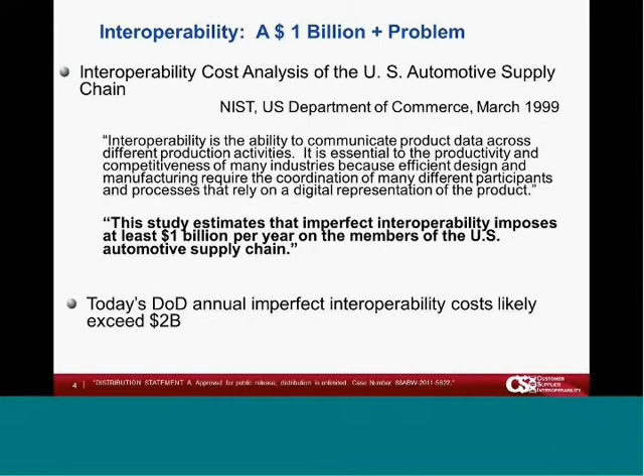And because of that, the Department of Defense and the Air Force sponsored this Customer Supplier Interoperability project, which we term CSI. It consisted of ATI, or PDES, who manage the STEP organization in the U.S. ITI is the technical lead on solutions for that.

We loosely defined this around the F-35 program. So Lockheed Martin is the prime contractor on the F-35, and two suppliers are Rockwell Collins and Honeywell. So that was our team of people.

The intent was to look at this supply chain. So we have a prime contractor, the government contracting with a prime contractor, and then they have a number of suppliers, and those suppliers have sub-tier suppliers. So the intent was to look at that, and with a large program like the F-35, there are literally millions of exchanges that occur over the life of that program.

So one of the issues we were trying to look at was the hidden cost of interoperability and making that more efficient. The other area we were trying to identify in this project was to look at this emerging MBE market. So we looked at where there were some gaps and tried to pilot some solutions that might satisfy that.

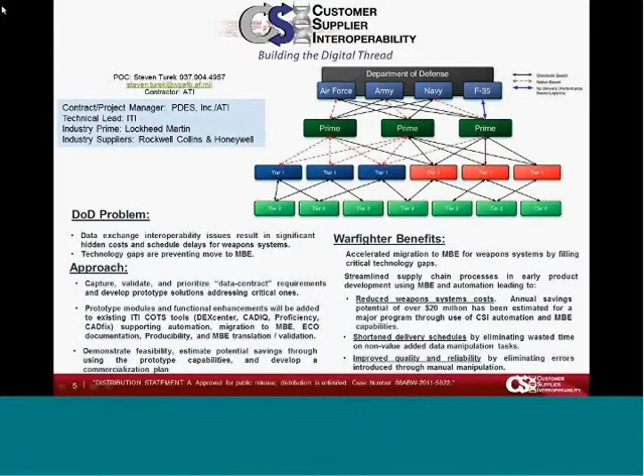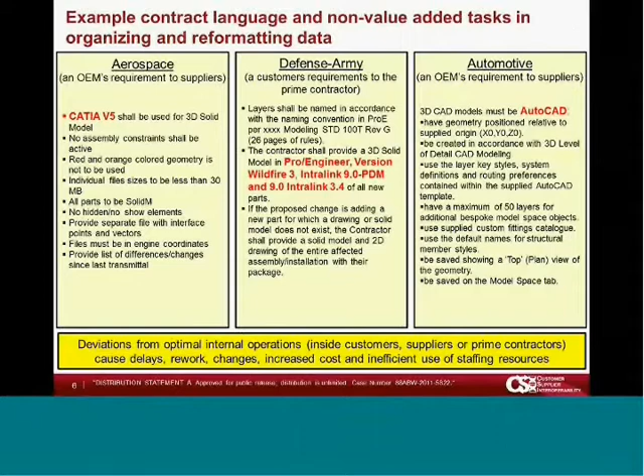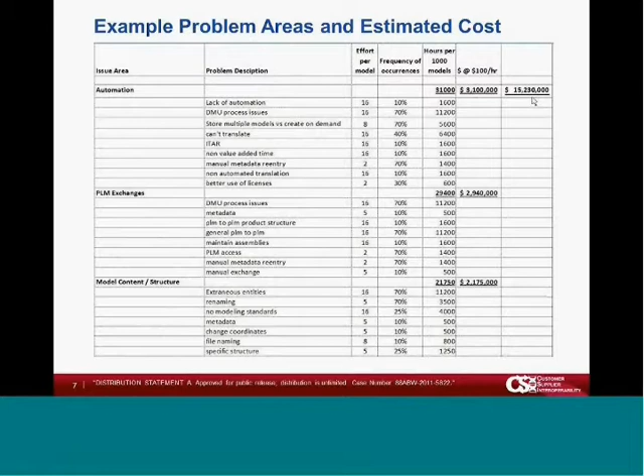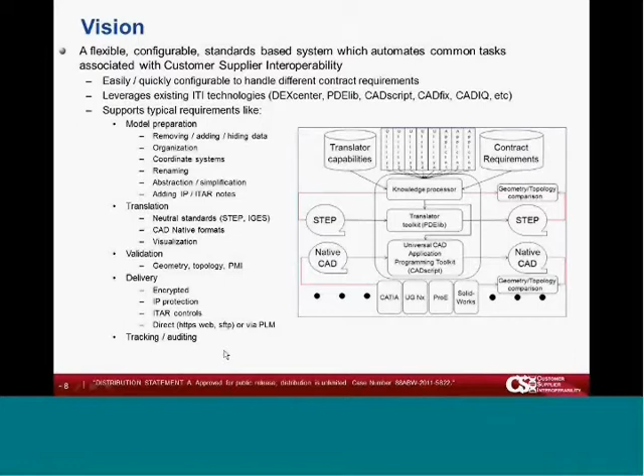Validation of that data, including the use of PMI, and then of course delivery, keeping that delivery safe and secure as you go through that process. And then being able to track what you deliver to someone as it applies.

So we said we wanted to use existing tools, and ITI was the technology supplier here in this case. So it's built heavily on ITI tools, but again, also built heavily on the STEP standards, the STEP translator support from the CAD vendors themselves. And just a little quick note about each of our products here.

So DEXcenter is the overall automation framework for this system that provides automated processing as well as delivery. We include CADIQ to do quality-related issues, validation, and we'll see some new things that we threw into MBE. We have a couple toolkits at ITI that allow us to access and manipulate standard models as well as native CAD models. Proficiency to be able to deal with feature-based and to dive deeper into some of the CAD systems. And then CADfix to provide a translation capability, and we'll see later some simulation or simplification capability.

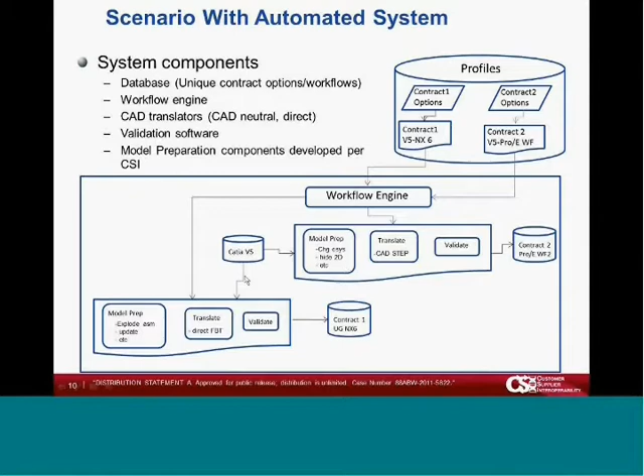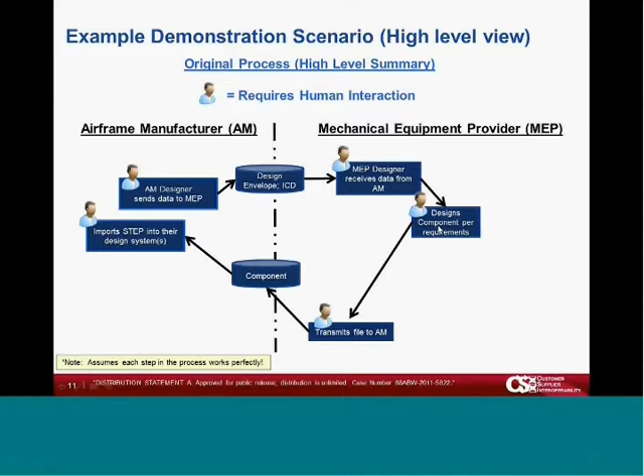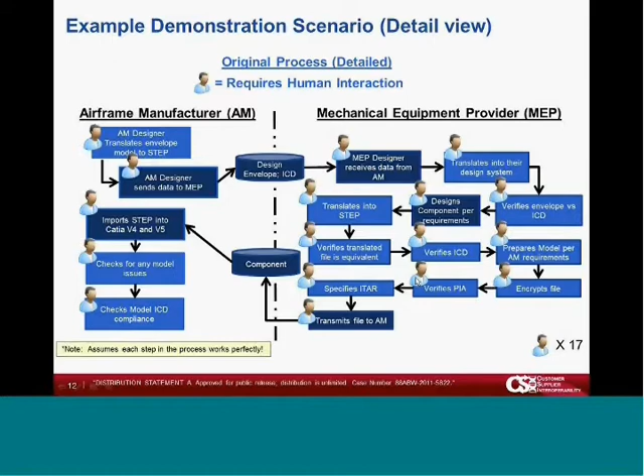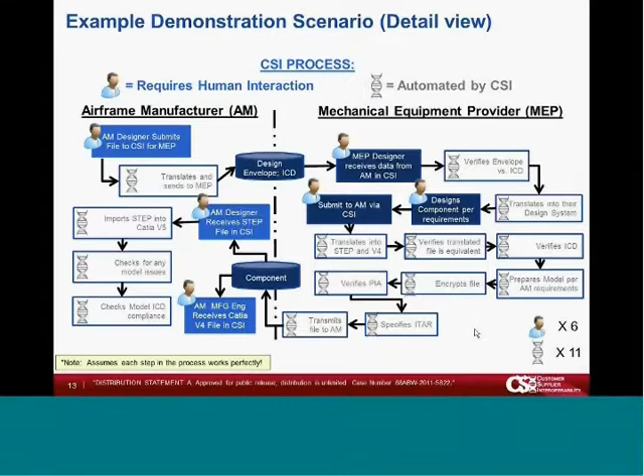What we're able to do in CSI was to automate about 2/3 of those. So you'll notice there are only 6 little people icons now, and the little DNA ribbon here is our CSI digital thread, if you will. So we're able to take a lot of those steps and automate that. So that eliminates time. It eliminates the cost associated with that, and it also improves reliability by eliminating potential issues that can occur when people do things manually.

So what I'd like to do now is share with you a video. I think it's easier to show this to you than it is to do this manually.

This is Tom. Tom is a design engineer at a leading aerospace supplier. Tom's company produces the APU, or Auxiliary Power Unit, for the F-35 program. This is an illustration of the original CAD data exchange process between Tom and the aircraft's manufacturer. Typically, the manufacturer would save their CATIA file into a neutral format, like STEP AP203, and then send to Tom in an encrypted email along with an Interface Control Data Document, or ICD.

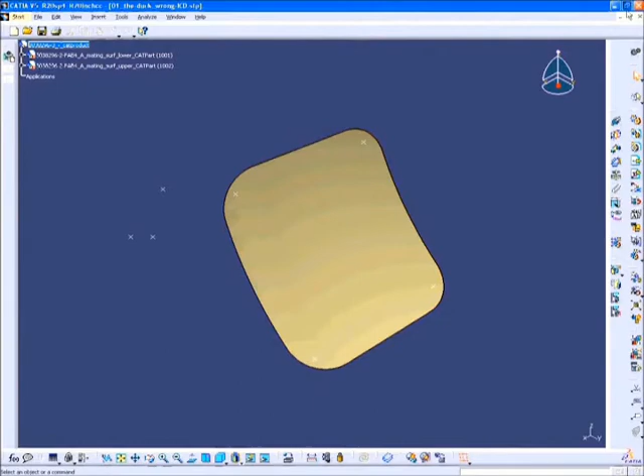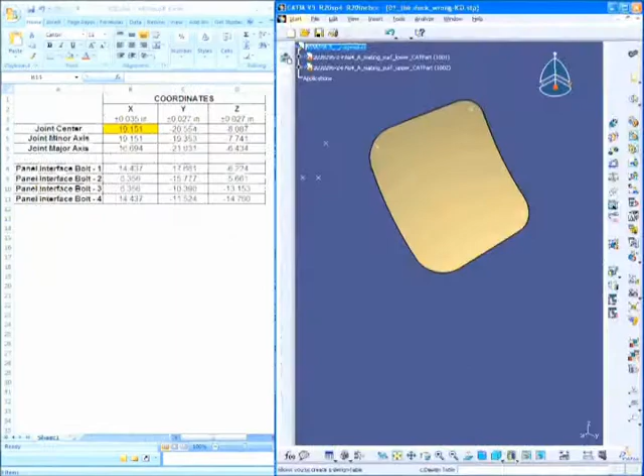In order to design a duct part off of the manufacturer's model, Tom begins by importing the STEP file into CATIA and then checking the ICD points for accuracy. Today, Tom notices that one of the ICD points is off by a ½ inch. He has to send an email to the manufacturer confirming the design intent and informing them that he will make the correction on his side. Now that things are corrected, Tom can finally begin to model the duct.

Once he has saved his file, he uses his CAD system to generate a STEP file. Tom sends his part back through an encrypted email to the manufacturer with a certificate generated acting as a log of the transaction. How could some of the wasted time in this scenario be avoided?

Enter CSI, the Customer Supplier Interoperability Solution, building the digital thread for major DoD programs. CSI removes inefficiencies in the exchange of technical data between suppliers and customers. Significant hidden costs are reduced through automation, while security, compliance, and quality are enhanced.

In this example, we see how differently this process would have flowed if the F-35 design team was using CSI for their product data exchange process. The aerospace manufacturer begins by submitting their CATIA file to the CSI framework. This initial submission will automatically complete an export authorization, check the file format, and check whether or not it is a part or an assembly.

The file is then translated from CATIA v5 to STEP, and the quality of the translation is validated before transmitting securely to Tom. A pre-processing script in CSI caught the ICD point error we saw in our first example. The manufacturer was notified and made the correction before sending to Tom. Now, when Tom receives the file from CSI, he proceeds straight to the STEP to v5 conversion and begins designing.

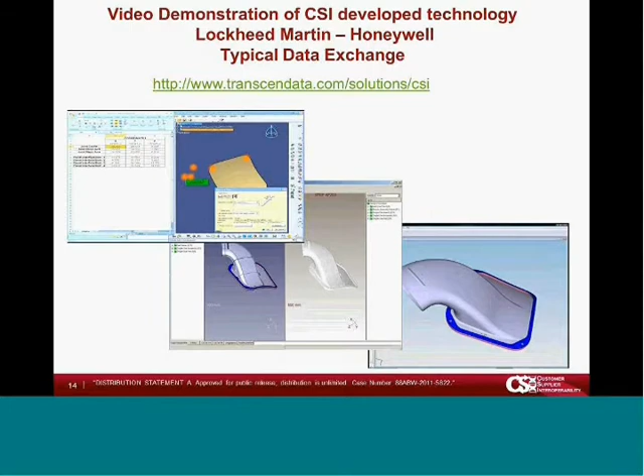So we were able to use our CADfix capability and come up with a new method to reduce that. We call it external filtering. And what this will do is it will take an assembly. It will first look at the assembly and determine which components of the assembly are visible to the outside. If they're not visible, they're eliminated. If they're partially visible, then those would be evaluated again, and only the surfaces that are visible to the outside would be included.

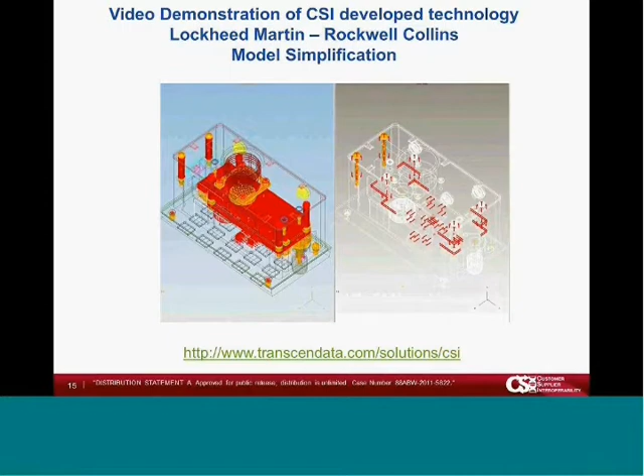So this was a nice little example of showing how dealing with these large models could be that. Now, I'm not going to show this video, but there is a video again at that location. You can actually see that a bit more.

So anyway, looking at all of these capabilities, we saw quite a bit of significant benefit from this. Overall, again, we made a list of issues. We didn't pretend that we were going to address all these issues, but addressing some of them in some form. Overall, we achieved about a 35% or about a third reduction in the time to do some of these processes. So that's pretty significant.

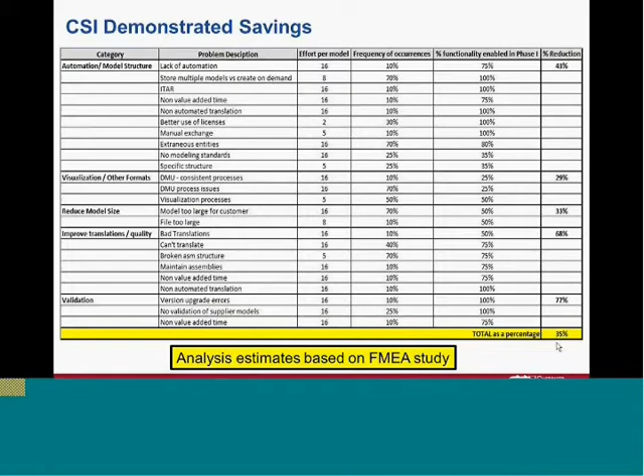Okay, so now I want to switch gears to the second piece of this project. We identified 4 areas that we thought were significant gaps that we would try to provide some pilot solutions for. And the first of those had to do with migrating from your traditional 3D plus associated drawing into an MBE environment. And we had each one of the industry partners here kind of lead these. So Honeywell led this from a standpoint of providing requirements, and then ITI looked at providing some solutions for those.

Second piece was, once you have some 3D MBD models, you need to share those with your suppliers, and you want that PMI information to be included with it. So you need to have a mechanism to do 3D PMI translation. The whole area of ECO documentation brings up a new issue. Traditionally, engineering changes are documented by marking up a drawing, but if you don't have a drawing, you need some mechanism to do that in a 3D model. So we came up with a new mechanism to do that, and we had Rockwell Collins leading that activity.

And then Rockwell Collins also led another activity. We've kind of switched to calling it Producibility, but it has to do with looking at your 3D models in terms of being able to identify manufacturing issues upstream.

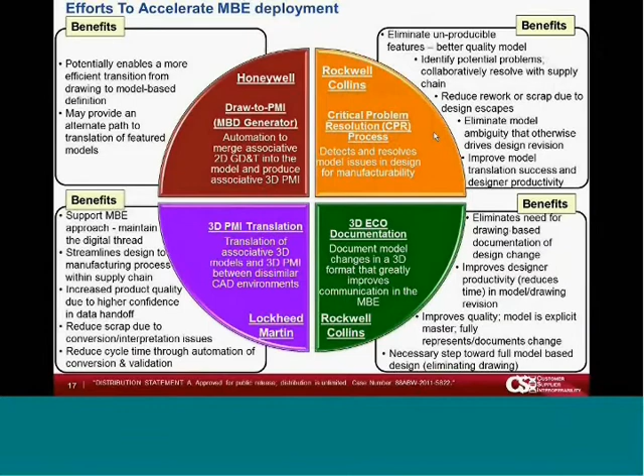Traditionally, if you have a drawing and a model, and there's some ambiguity in it, your manufacturers take care of it. Maybe not officially, but they'll take care of it when they do their machining. But if you're working on a 3D model, it's part of the model, and it's more important that the model be correct. So let's look at each of those a little bit more.

So the first one is this ability to migrate to the MBE environment. The scenario here is you have a 3D model. This is a CATIA model. You have associated CATIA drawings. What we developed was a utility that would take those two together and create a new MBD CATIA V5 model and put PMI on that. So that's a reasonable way to get to an MBD model pretty quickly.

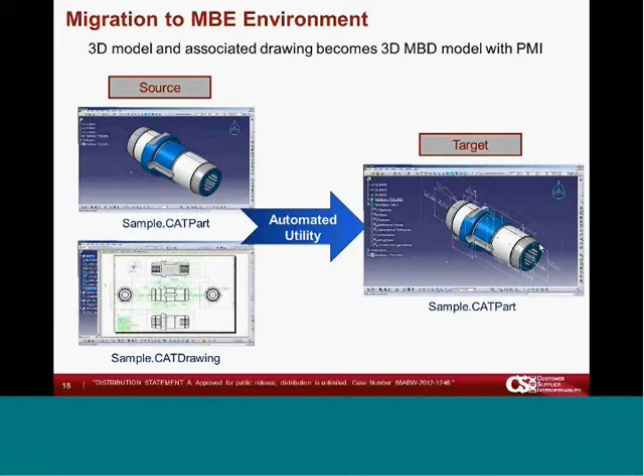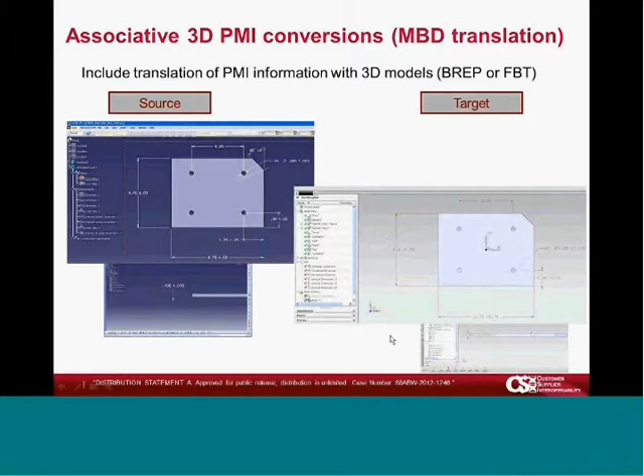Second area was being able to translate data with PMI. Using our proficiency software, we started with a V5 model which has PMI on it, a V5 MBD model, and we're able to translate that to NX, including PMI information as we go. So that's an important piece to communicate with downstream suppliers.

We have the ECO process. Again, it's different to do that. We're not marking up a drawing anymore, so we had to come up with a new way to do that. The approach we took was that a designer would sit with the person making a change and would make the change in the 3D model.

Then we would submit that to the CSI system. The CSI system behind the scenes would use CADIQ to do a comparison of those, and we would end up with a 3D PDF file showing the differences, with little pull downs here. We've got another video that'll show that in a bit more detail.

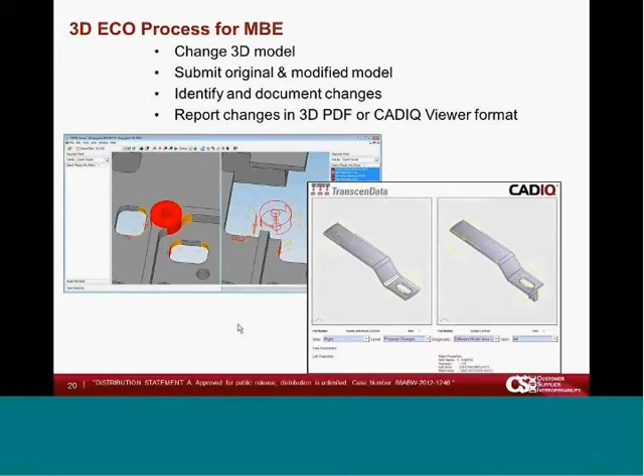And then the last piece was this idea of producibility. We did an extensive study with Rockwell looking at machined parts and identifying issues that were there, and again presenting it in the same way. This mechanism of using a 3D PDF file and being able to zero in on different things seemed to be a good way to do that.

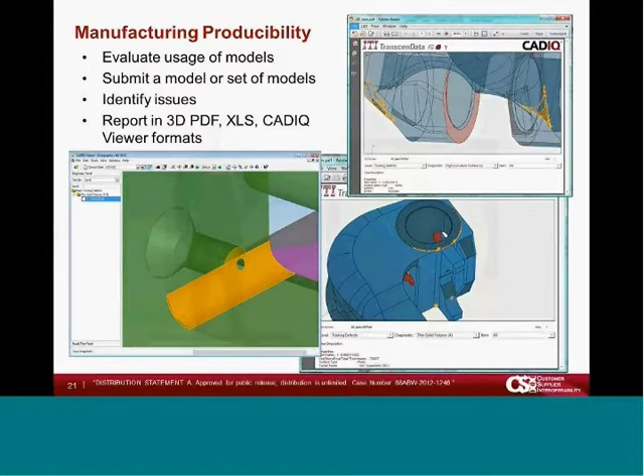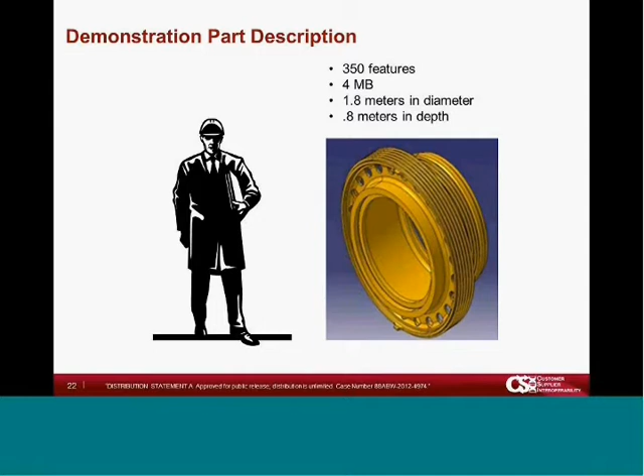So let me talk through the scenario we did. This was a part created by Honeywell that is representative of the different modeling techniques they use. If you just look at it, it doesn't look that complex, but it actually has a lot of detail in it, a lot of features. And the scenario we came up with was a realistic one.

So we have a prime contractor who has just received an award for a new project, or if it's not a government business, you're starting a new project internally. As in most projects, you want to reuse existing data. Very few projects start from scratch and redo everything. So you have a lot of existing data, but this prime also wants to move to the MBD environment. So we're able to use this utility we created to generate MBD models from the 3D model and drawing.

And then we'll go through and look at producibility. Are there issues that might be problems that can't be produced, or might be more expensive because of the way it's specified, that could be made less expensive? Work through the engineering change process. In this case, we want to put a hole in, and then translate all that to the supplier who's using NX. So that was the scenario we went through.

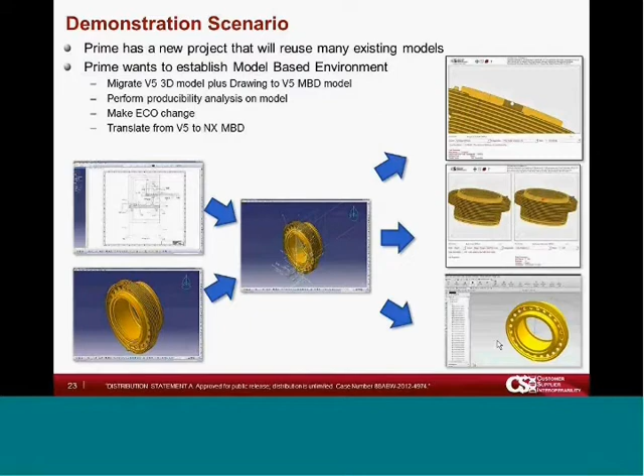So that scenario looks like this if you went through it manually. You would start with a V5 model and drawing, manually add PMI to it to get an MBD, and make your engineering change. You would document that change typically by making screenshots and other documentation and then validating that it's right. Translate it to a different CAD system, in this case NX, either BREP or feature-based, depending on what you want to do. Without the ability to do PMI, you'd have to go back and add PMI to the model again.

Inspect that model, compare the V5 and the NX models. If it's okay, you send it on to your partner. Your partner receives that model. They'll visually compare the models and look for producibility issues. And this was an area we identified as really requiring a lot of effort. When we get back to talking about the ROI, I'll explain that a bit more.

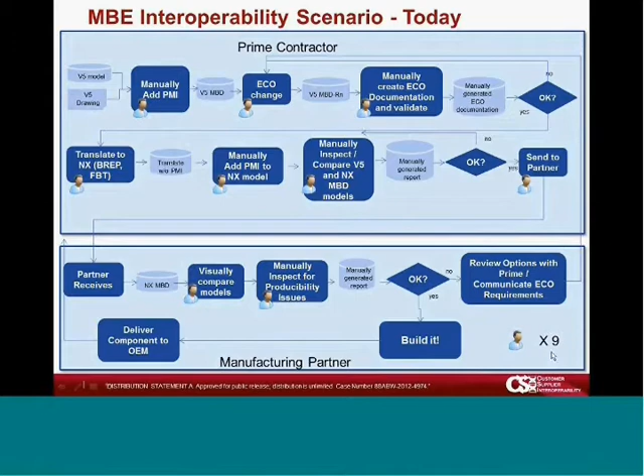And then if everything's okay, you go off and build it. And again, the number of manual processes in here were 9. If we look at incorporating this into our CSI capability, then again, we're able to automate really all but 2 of those. And the 2 of those are reasonable things you probably aren't going to automate. It's actually making the engineering change and then somebody reviewing the documentation and the model.

So being able to automatically generate the MBD model, being able to automatically create the documentation, at the same time validate that the change was made properly, being able to translate to NX, validate it, send it off to the partner all in one step. And then on the other side, the supplier receiving that, being able to take a 3D PDF file and recognize that, with the 3D PDF, it was much easier to determine what was there and have a comfort level they could go build it. So significant savings in that regard.

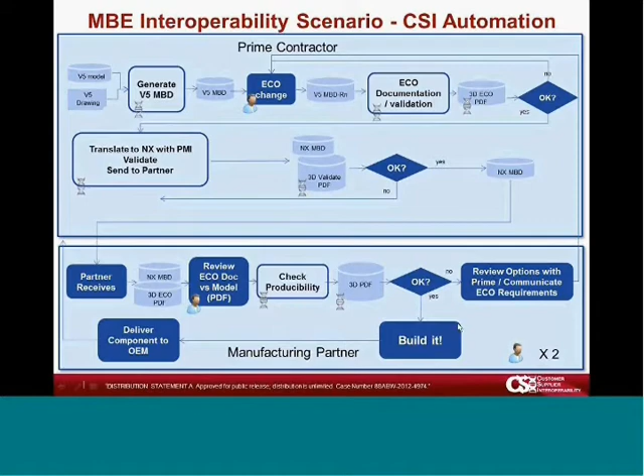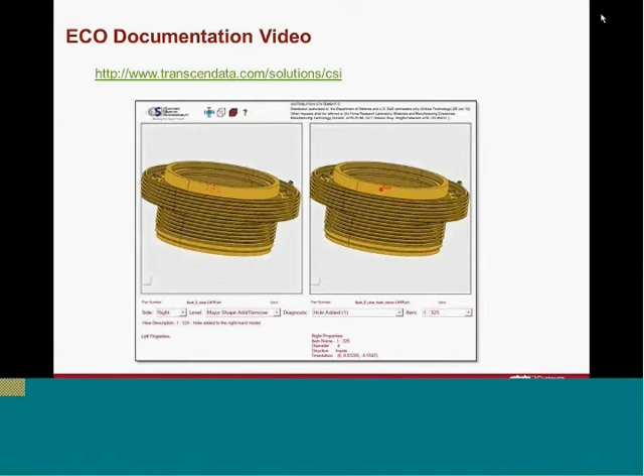So I'd like to try to show you another video. This talks about the ECO documentation process. And again, if you're using your computer for sound, you're okay. But if you're using your phone for sound and you also have the computer on, you might want to turn down the sound on the computer. So I want to do this one.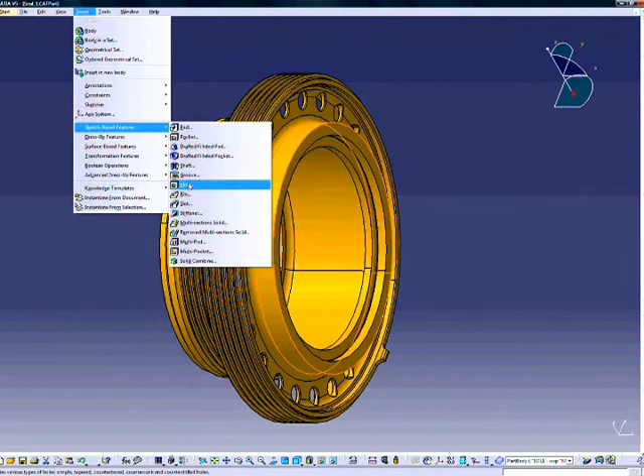In this example, we show how CSI can track engineering change orders, or ECOs. A design engineer for a major aerospace supplier opens a CAD model of a seal and completes an engineering change by adding a hole that will be drilled into the part. Once the CAD model is back in the hands of the OEM, the CSI process runs a comparison, identifying any ECOs that have taken place. The user begins by logging into the CSI program and creating a session. This session will be titled Check ECO for CATIA V5 part.

The user then selects recipients from predetermined profiles, copying themselves. The type of session is then specified. In this case, ECO documentation is selected from the pull-down menu. From there, the files to be compared are attached using the drag and drop capability. Once the Submit button is clicked, the user is prompted to select which file is the baseline for the ECO comparison. The user selects the part before the change. Then the processing begins. Using the native CAD system, CSI interrogates both models and compares the geometry, quickly identifying changes. In this case, the hole that has been added.

The user selects the original V5 part and the modified part which had the hole added. An analysis runs, comparing the two files. The change is then identified. Here, you can see in the left frame our baseline model file, and on the right, the modified part. In the frame on the far right, the identified change is flagged in red and states hole added. The change is also highlighted on the part in red. The ECO documentation is then produced in CSI as a 3D PDF. Here you can see the change is documented and easily shareable via the PDF format. This part and documentation is now ready to be sent back to the manufacturing supplier.

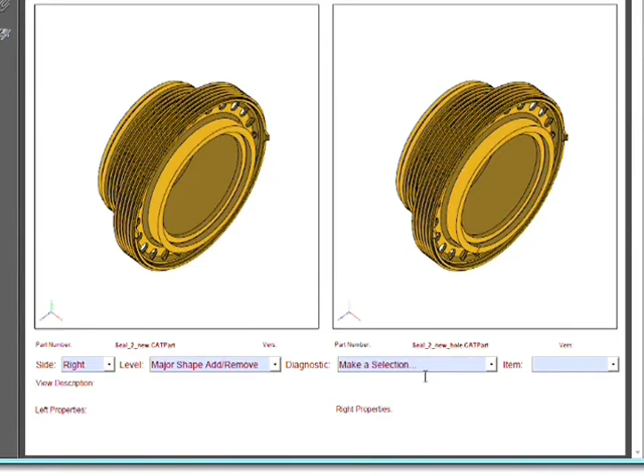This is a very basic example. Often changes from one revision of a model to another are difficult to find, let alone verify, particularly if the model is complex. Alternative methods for identifying changes, such as visual checks or volume comparisons, are not as reliable or efficient. The ability to rapidly review and verify individual incremental changes in a systematic way offers valuable savings in time and cost in the design and manufacturing process.

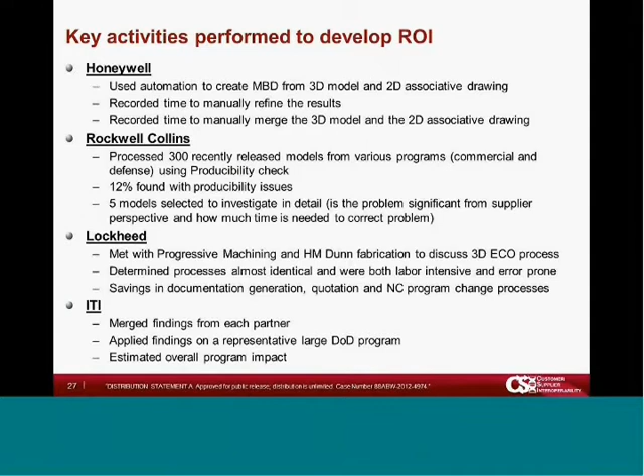So the next activity was for us to try to determine, with respect to the MBE capabilities, how did this affect our ROI? We were able to save money and improve the process there. So we did a number of things there. Each of the partners took on an activity. So Honeywell took on the activity of looking at the MBD model. So creating an MBD from a 3D model and associative drawing manually, recording how much time it took to do that, and then being able to translate those to another system. So we'll look at those results in a minute.

Rockwell Collins looked at the producibility, and we actually used 300 or so of their production models, and we ran through and did a producibility check, and lo and behold, we found some. Fortunately, they were not serious issues that affect their use, but they were issues.

So we were able to dig into those a bit more, and we'll give you some information on that. With Lockheed, Lockheed met with two of their key suppliers to discuss their 3D ECO process, and that's where we discovered that there was a lot involved in what happens in that 3D ECO process, where they could literally spend days or weeks evaluating models to try to identify what the differences were before they would quote on making the changes. They wanted to make sure they understood the differences. They also wanted to make sure that there weren't any unintentional changes that slipped into the process that might trip everyone up later. And we'll give you some results on all those.

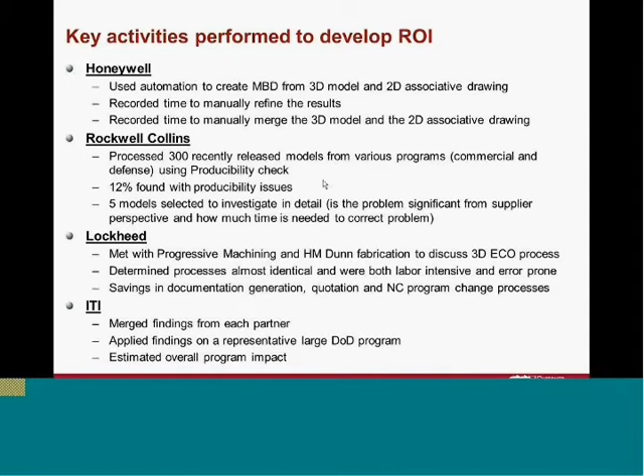And then from an ITI standpoint, we tried to take all this data and merge it together into an overall program. Let's see here.

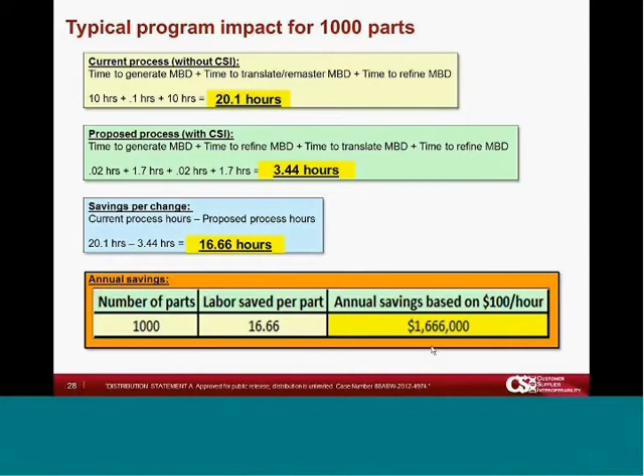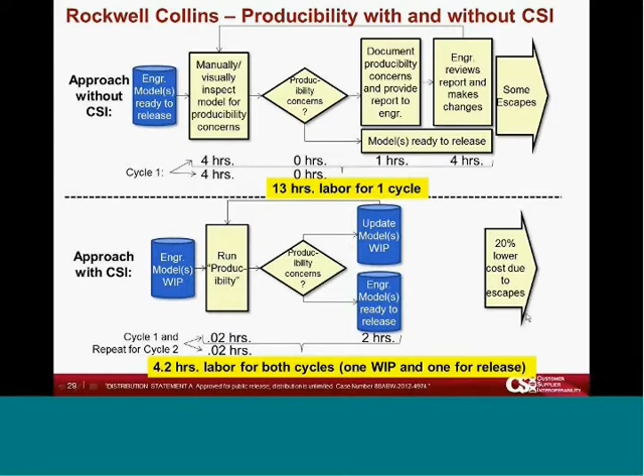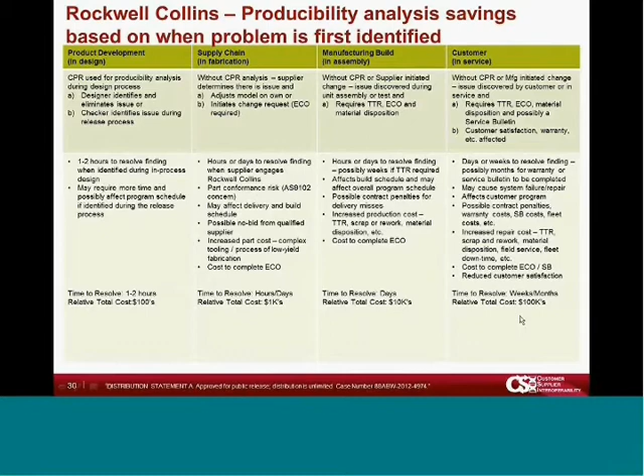Further on that, Rockwell Collins did an evaluation of what does it cost based on where in the cycle you find an issue. And clearly, if you're finding it while it's in the product development stage, it might only take a few hours and a few $100s to fix it. If you're further downstream in the supply chain or in your manufacturing, or lo and behold, it actually gets out into service and you find it, then the time required to address issues continues to grow, and the cost grows almost exponentially throughout that.

From the ECO standpoint, this was again the activity that Lockheed did with a couple of their suppliers, and they looked at both simple models and complex models. In both cases, they saw a reduction of at least 25%. So if you took 1,000 models and you extrapolated across some mix of simple, medium, and complex, and all of those models were being changed, you're in the order of $300,000 or so.

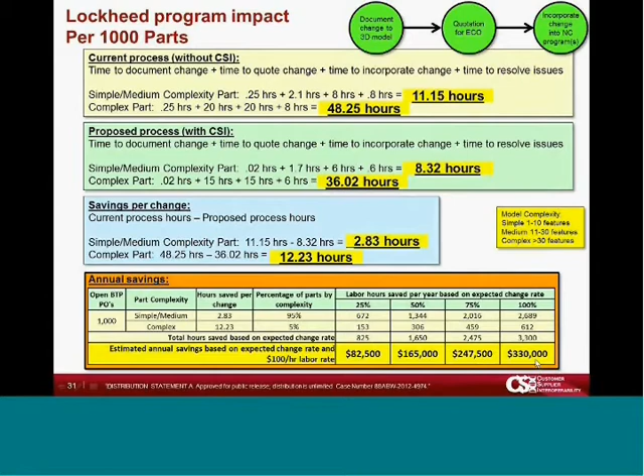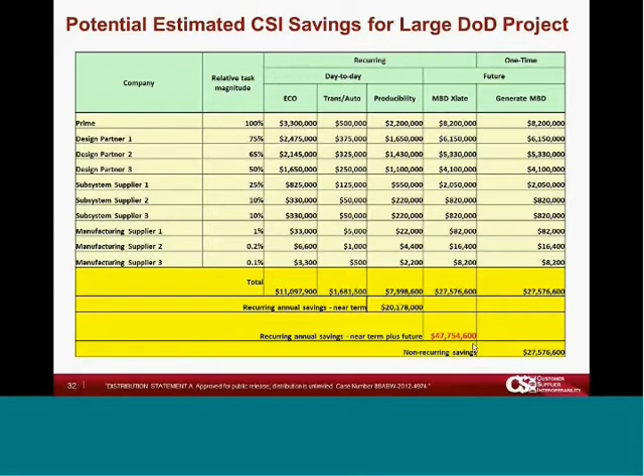Next extrapolation then is to say, okay, if we have this data from these partners and we have a whole supply chain where we have a prime, we have different design partners, the relative task magnitude represents what percentage of the total models in the part are associated with that supplier. And as you get further down, there are fewer and fewer models. But bottom line is there was in the order of $50 million in annual savings in terms of using some of this technology if they could put it in place throughout the entire supply chain.

So if you extrapolate that over the life of a program, like an F-35, 30 or 40 years, that $50 million a year, you begin to approach the billion. In fact, you exceed the billion dollar mark in terms of being able to deal with some of those issues. So very, very significant savings.

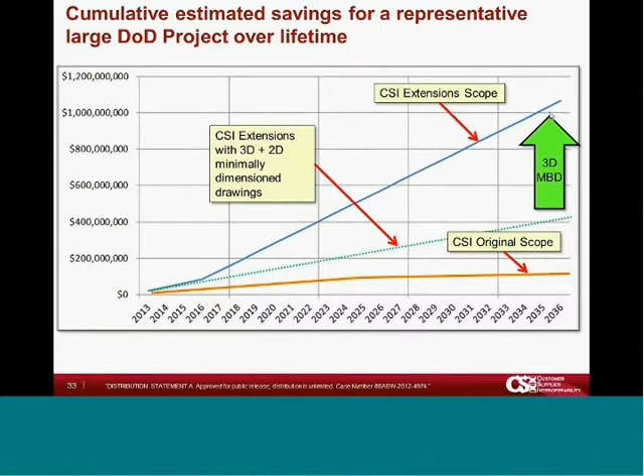There's a lot of the capability available through our DEXcenter product that lets us do basic secure transmission, ITAR regulatory compliance, being able to do translations, validate those translations, and including these new capabilities that we talked about. The ECO documentation is something that we can provide at this point in time. The producibility is another capability we can provide at this point in time.

For machine parts, we did this work based on machine parts. There's certainly other manufacturing techniques that might need some more work, but the framework is there to do that. It's more a matter of what to check.

The CADfix simplification capability is available, and the proficiency side, the ability to generate MBD is available for V5 models. We have sort of a pilot implementation for NX, but all of these are areas where over the next months and years, depending on the demand of the market, we'll continue to enhance and provide those commercially. We're always looking for partners to work with us who can help guide us with the requirements. It was very beneficial to have this team of Lockheed, Honeywell, Rockwell Collins to help identify what we really needed in that area.